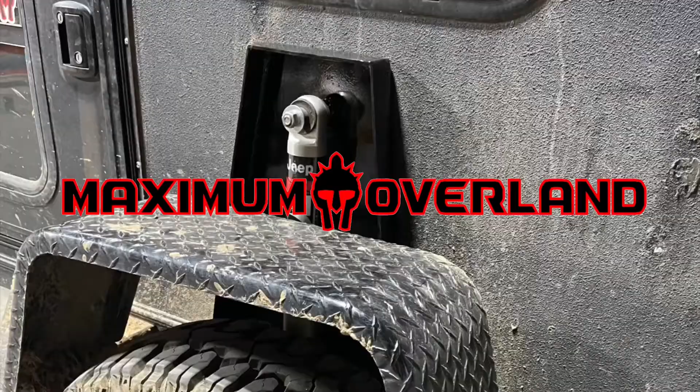I told you last weekend on Fab Time for the drop extension that I had a little bit of things to do with this guy right here. It's suspension related. We're gonna do some dual Fox shocks. But anyway, stay tuned. Okay guys, this is what I got.

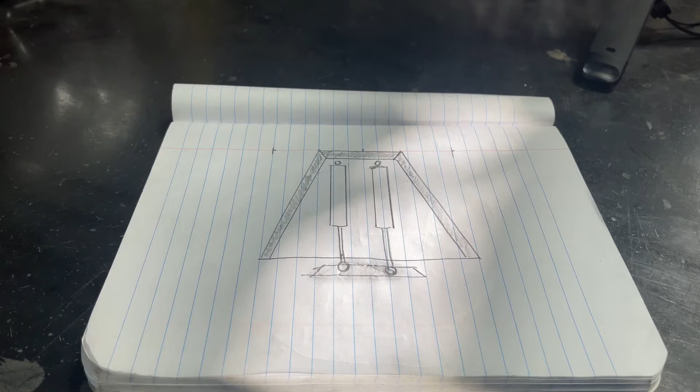I told you long ago that I absolutely love the trailer, but there's some things I would do a little different. I think it's more of an engineering standpoint than a comfort need or a downfall of the trailer. What that is, in my opinion, is the aggressive shock that the trailer takes when using the Timbren suspension. There's literally no ability to soften the load when it comes to compression and dampening. That's the one drawback I think the Timbren suspension has.

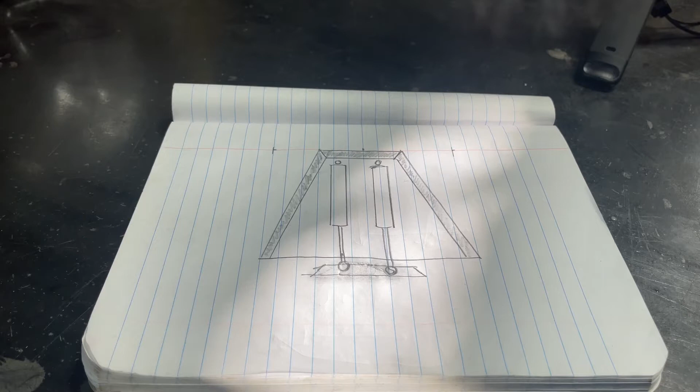Well, I think I'm going to change that and fix it for myself. What I noticed is I try to take the trails as easy as I can, in respect to speed. But unfortunately, when this thing has 15 gallons of water and it's loaded down, on some of the washboard roads, you'll notice it starts to bounce. A lot of that's because there's no compensation for compression and dampening, since there's no mechanical parts to the Timbren suspension.

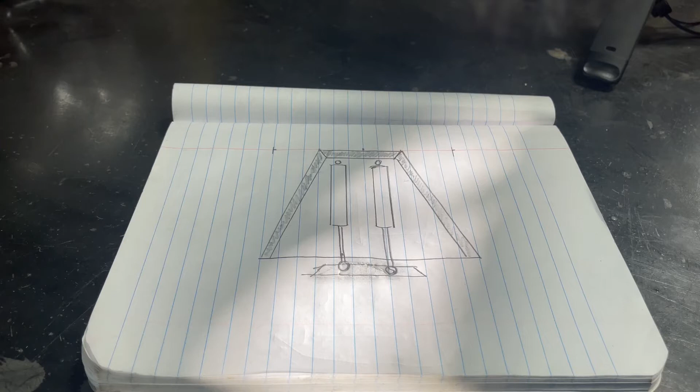So what I've decided to do is this. This is a standard dual shock setup, and I'm going to build this tower. This tower will attach to the frame in a manner that it's rigid going up, and it'll be bolted throughout.

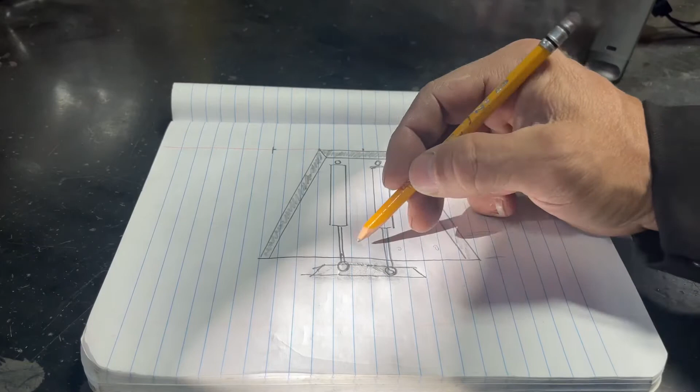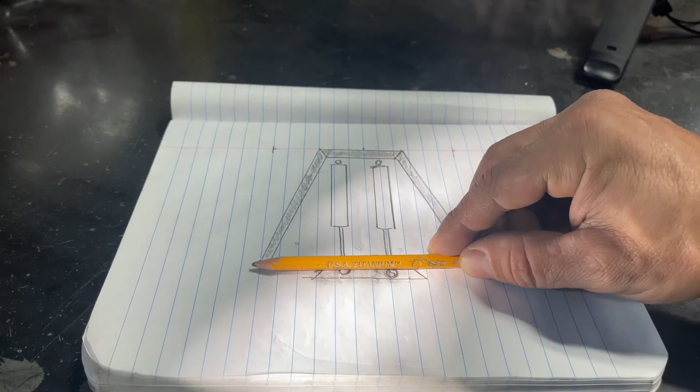And what this will do is it'll attach to the axle that comes out from the Timbren suspension. So when this suspension and trailer comes up off the ground, and this portion wants to drop immediately and then compress immediately, it'll slow the drop down, helping to absorb some of the hit, and slow down the compression of the swing arm coming back up.

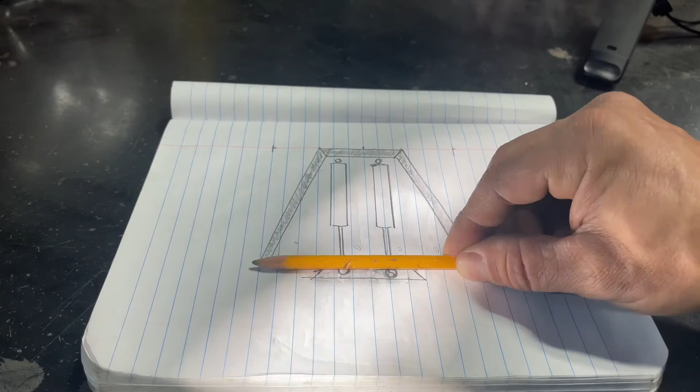Because right now there's a slight gap. So when the rubber stretches out, it's all the way extended, and then when it gets shoved back up to its normal ride height, it gets compressed into it, and there's nothing slowing that down. So I believe this will fix our issue. Stay tuned.

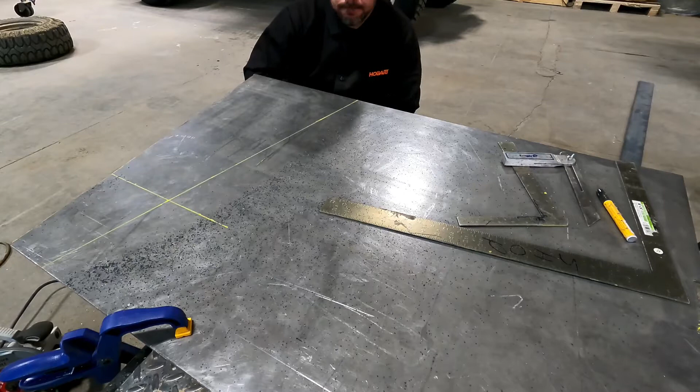Hey guys, I'm gonna jump in here. This right here is 3/16 plate, what I'm making the base plate out of. I think you guys will be surprised when you see what I cut it with. But this is what I actually cut it with, and it does remarkably well. If you can see this edge, this is the edge I just pulled off. I'll show you real quick on the second cut, but I just figured I'd let you guys know how I do that. You can do it up to about quarter inch.

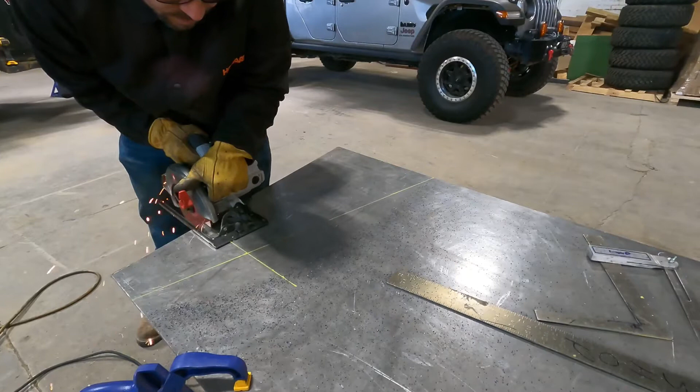Pretty simple, guys.

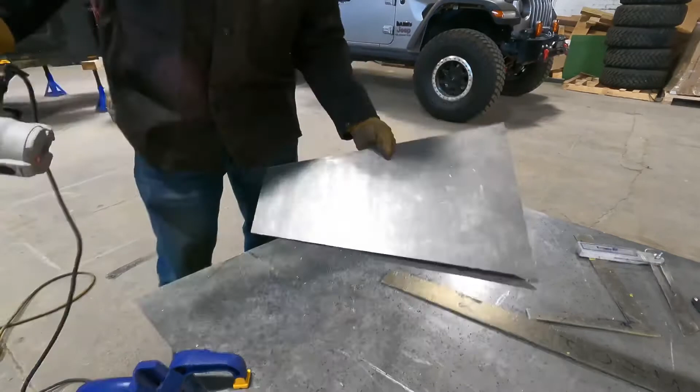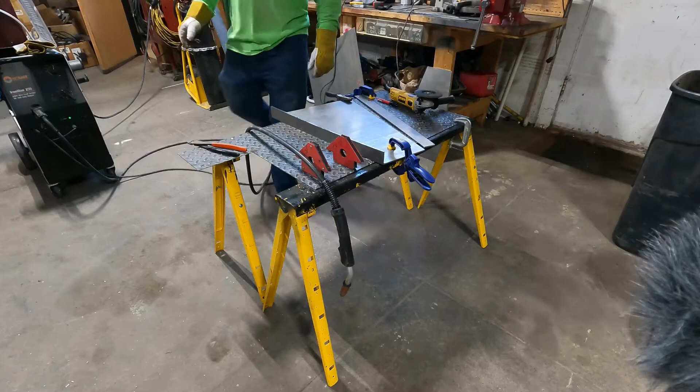Okay guys, let's see if you can kind of pick up what I'm putting down when it comes to my towers. Let me get in the frame so you can see me a little bit. This is exactly the same kind of setup you would build for adding coilovers to your Jeep or truck - it's just essentially a shock tower.

So I'm gonna go ahead and box this in real quick, and once we get it built, I'll show you what it looks like before we apply it to the truck or the trailer, and see how it fits before we move forward on that. Okay, here we go.

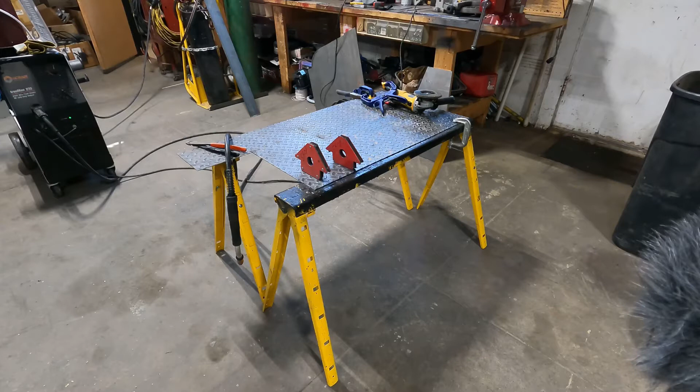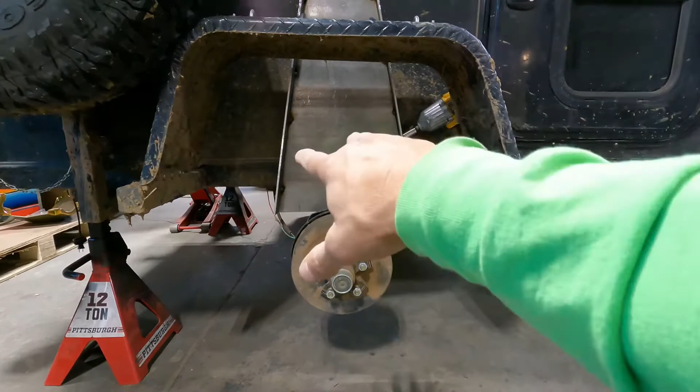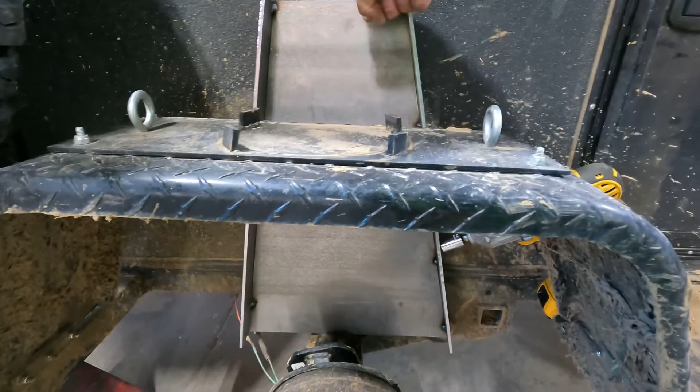Okay guys, let's look at it. So, it's kind of hard to tell exactly what's going on, but that's how the shock tower will be set up. You can see it'll actually not be all the way down on this bracket, it'll be right there along the frame rail. Then what I'll do is run 4 big bolts through the actual frame rail itself. Then up here is where the shocks will mount, and we'll plate this across the top, and your studs for your shocks will come out right there. Then it'll reach down, and you can see how it looks in there. See? So let's keep going.

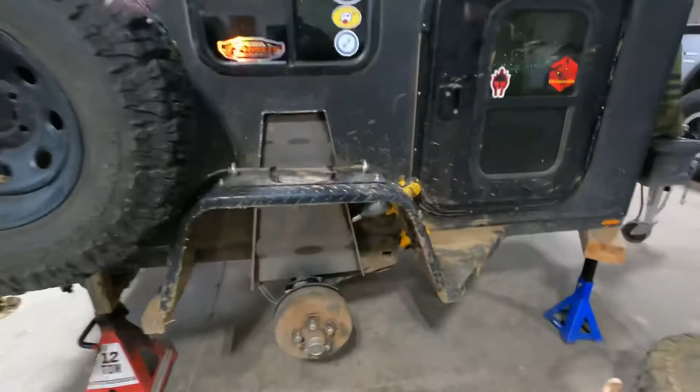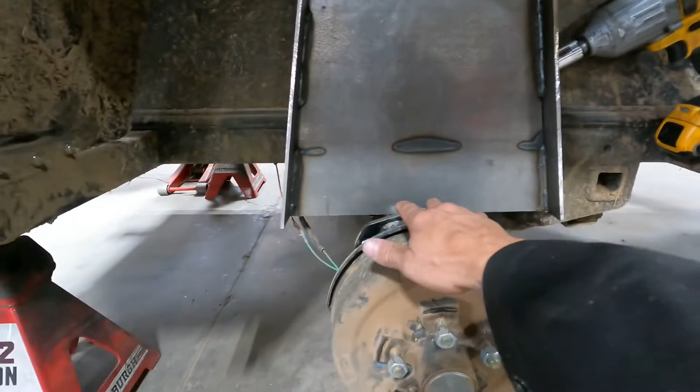If you look, the Timbren suspension right here, the way it sets up is they welded it, particularly this company welded it directly to the frame, and you can see part of it there. So what I'm going to do is raise this plate up to even with the frame rail and use the existing bolt holes through the Timbren suspension to attach partially some of the shock tower. I'll get it up, pre-drill these holes, get this plate up, mark them from behind, and then drill them, run those bolts in so I can run 2 more.

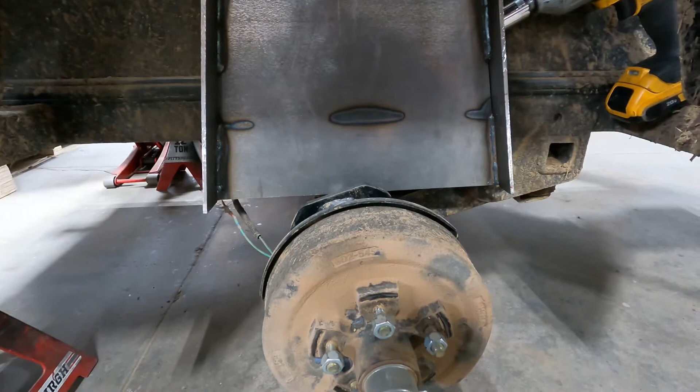Hopefully what I'm going to do is run 4 bolts across the base of this. I believe that with that much 1/2-inch bolt plus a stress plate in the back, it should be strong enough to support the weight of this trailer, and then obviously the wear and tear of 2 shocks. This is a pretty solid piece, and I think it's going to do the job quite well. Anyway, let's get to it.

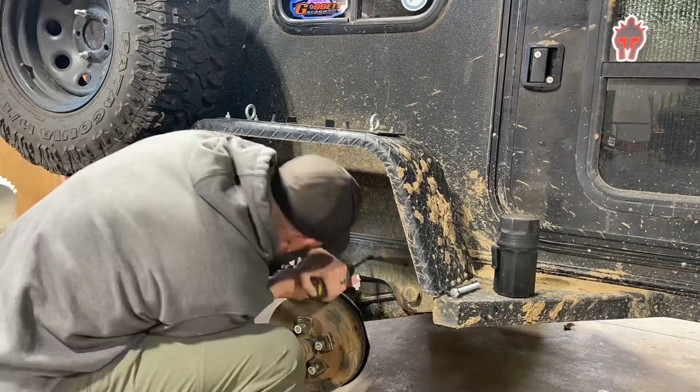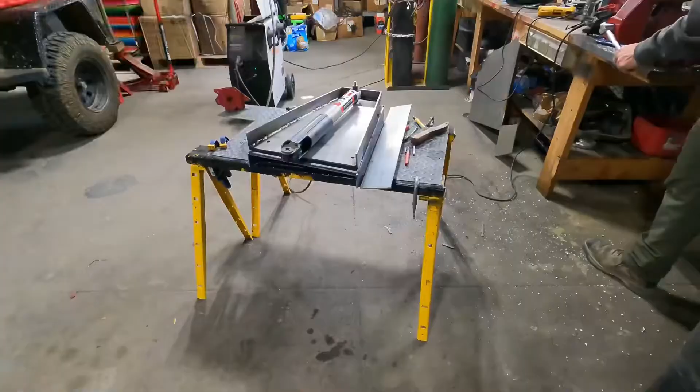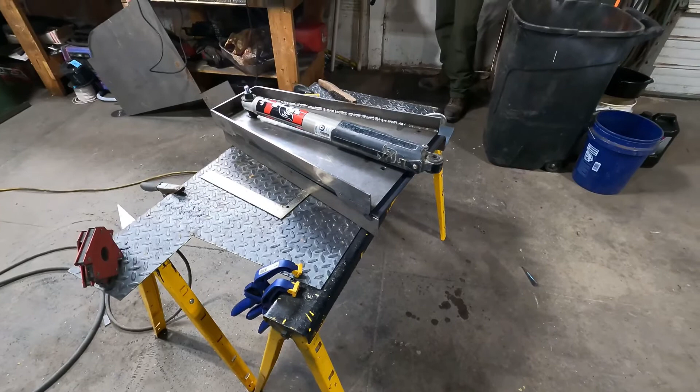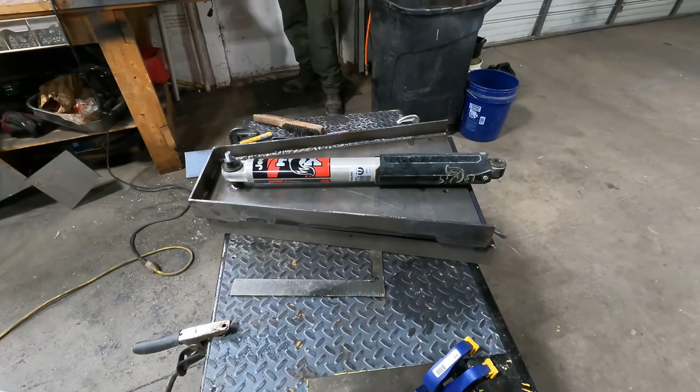Okay guys, now maybe you can get a good understanding of what I was talking about. That's what I was talking about right there, it's a standard shock tower. I think this is going to improve the ride of that Timbren by a lot. I hate to say that I have to do fabrication like this to make the suspension better, but Timbren definitely lacks a little. I mean specifically in the dampening and compensating for the immediate compression, that rubber doesn't do its justice. It does well on fire roads, but when you get anything else other than that, it seems to struggle with it. So I think this will help with the compression and dampening when the bumps get faster on washboard roads and rougher things. Anyway, that's what it looks like.

I'm repurposing the Rubicon 2.0 Fox shocks from the original Gladiator suspension, and now it's basically ready for paint and to get one on and installed, and let you guys see what it looks like. Stay tuned.

Don't forget to always cut your tip.

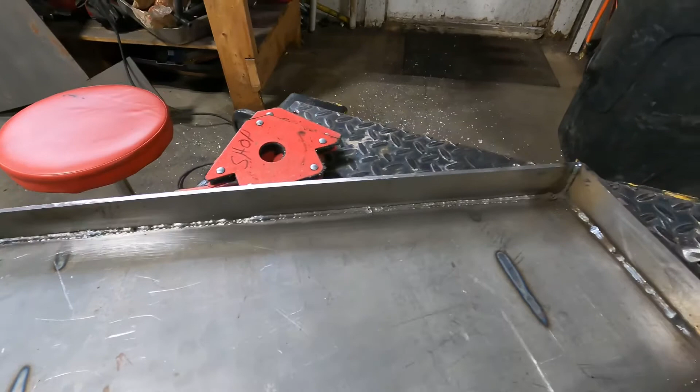So you can see I didn't do it all in pieces, you can see that it's stitched. The reason why you want to do that is because you want to prevent warping. On this piece, what I did is I generally did it in about 4-inch increments all the way up the sides and across and down. That way you don't get warping, you get even heating, and it just turns out better. You're happier with the piece when you're done and it fits properly, instead of getting in there and needing a spacer or washer because it's uneven. That's generally from welding too fast and too much at a time.

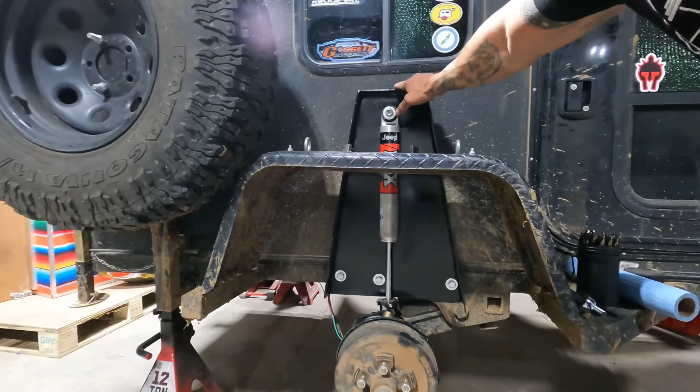All right guys, fast forward and catch up, and I've got it ready. Check this out, it is insane. Look at this. So now you can see what I did - I created this shock tower to house this 2.0 Fox shock so that it'll assist the Timbren.

This is the Timbren, we'll call it the control arm. What it's doing is it's attached here through this half-inch plate, and it helps dampen the ride on this Timbren, which is just about everything that everybody complains about. I originally set it up with two Fox shocks, but it was a little rigid, and I believe this is the sweet spot in between.

So let me finish buttoning it up, put it together, and I'll show you what it looks like with the tire on it. Here we go.

Okay guys, there it is. So now you can kind of see how it works and the setup. I'm just super excited about this. This is something I've been thinking about for a while now, and I'm glad to be able to get it done conceptually and it worked like I wanted it to.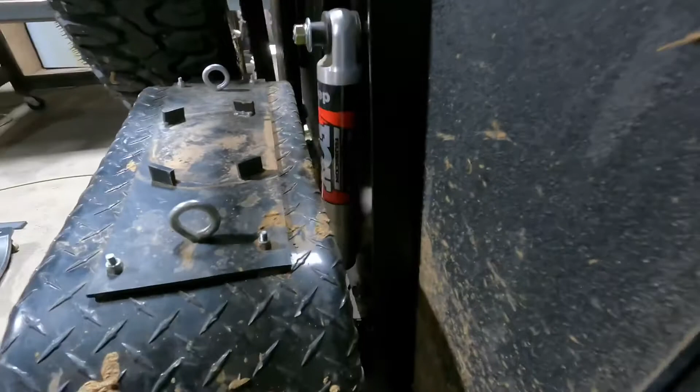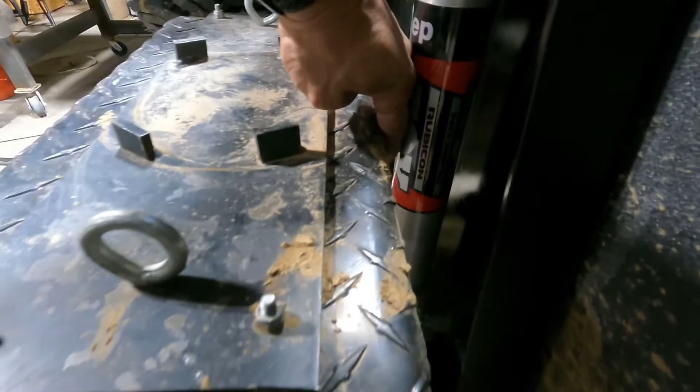I'll show you how it works in between here. As you can see, there's plenty of flex between the actual shock tower, the shock itself, and the fender, as you can see right there. I can stick my hand in there. So any kind of deflection is going to be backwards versus this way.

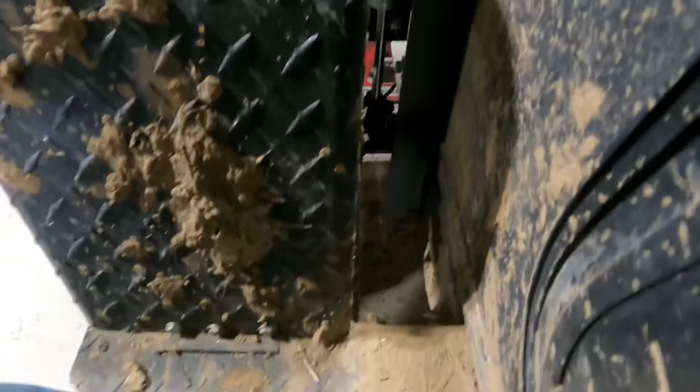It couldn't have turned out any better. I was absolutely super lucky that it did. I kind of wanted to just show you guys how it worked and how excited I am. I really am, guys. I think by the smile on my face, you guys can see I'm pretty happy.

Thanks for watching. Next week is Thanksgiving, so I hope all of you get your family together for some wonderful family time, friends, family, whatever. Then at the end of the week I'm heading to the mountains, and I'm going to do a solo trip - a couple high mountain lakes up in New Mexico. But anyway, stay tuned, thanks for watching.